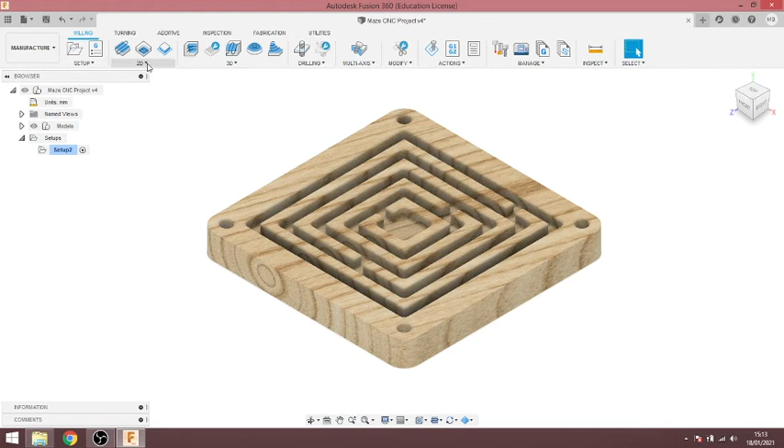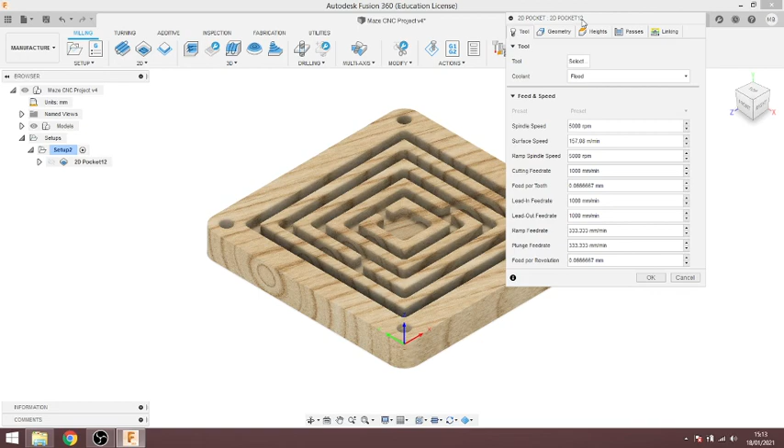So the first thing I'm going to do is, now in this tab here, there's loads of different things you can select, machining operations, 2D and 3D. Okay, so like contours, a great one for using within designs for vacuum forming patterns. For this, all we're going to focus on is a 2D pocket. So the first thing that comes up on here, I need to select my tool. So if I click select, it brings up this window. It may be blank on your computers.

If you look at the left-hand side where it says cloud, there are loads of pre-designed tools in the Fusion library, but we want to have constraints to the ones that we've got to work with. So I've got a named folder directory here for the machine we've got access to, and then all the various cutters that I've been using. Now, within this project, I've already added one of those in. I can share a link to those cutters to you individually.

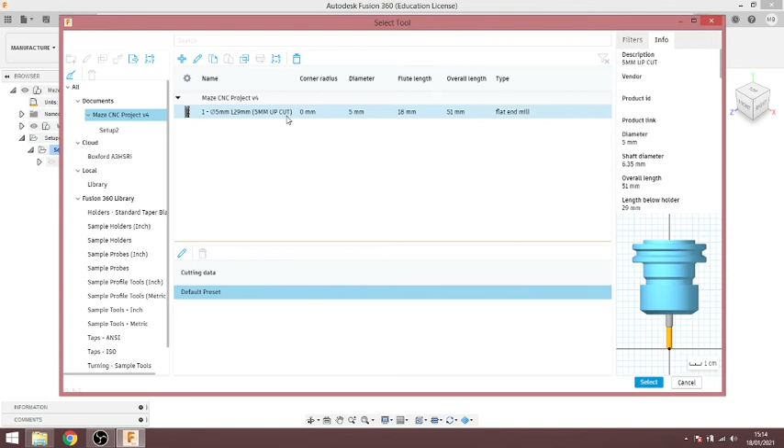So I'm just going to select this 5mm diameter cutter, which is an upcut. So that means that the flute, the spiral section just below the shank, as it's cutting into the material, it's lifting the waste up. Okay, so that does two things: helps extraction, prevents overheating and tool wear. Okay, so press select. So you can now see there's a mock-up tool head there and a cutting tool below.

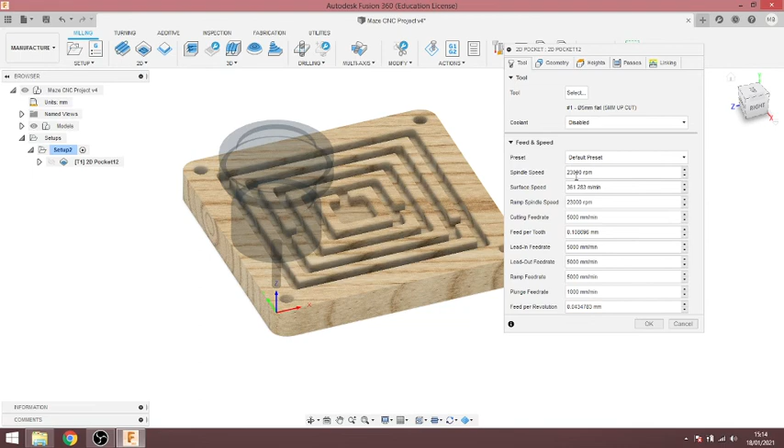So the next thing we need to do, sorry, just worth noting, the feed speeds and the parameters here are preset. That's already been documented in by myself. So within the geometry, we want to select a specific geometry now. So it's important here, you understand you're not selecting the top surface. You want to reference the bottom. And you should be clicking on specified lines, not faces.

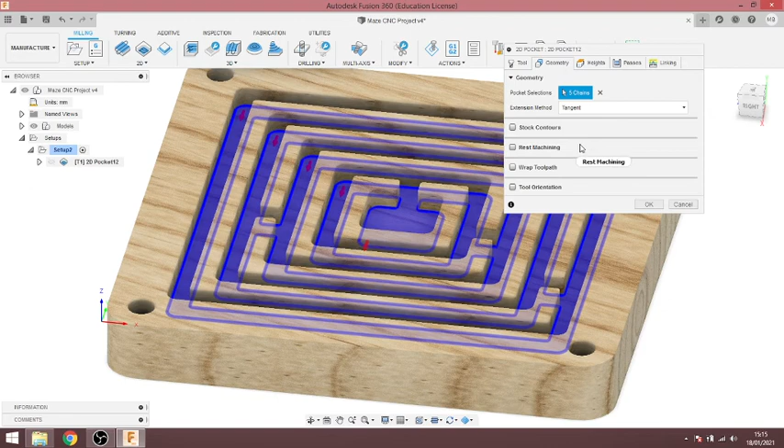Next thing we want to do is set the heights. So if I just look on the side here, there's a couple of things to know. The blue outline is the top height, and that's the top surface of the stock material you've got in, and that refers back to the original setup that we put together. Then there is the feed height and retract height, which are together. So that is the height the tip of the tool will be at when it finishes a machining operation, and the height it will move at when it's going to the next operation.

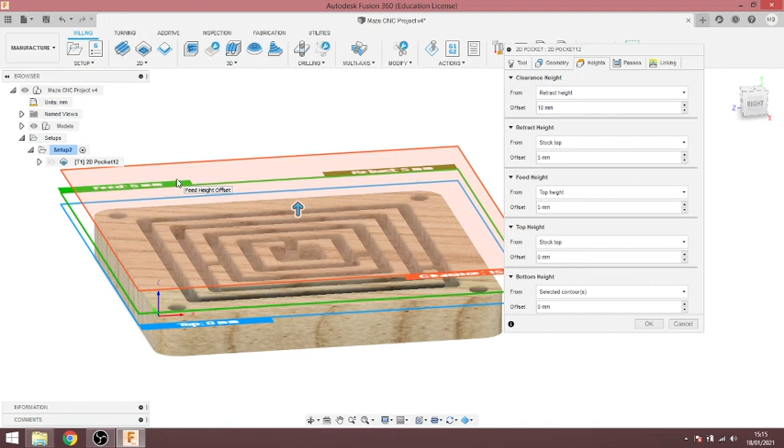And then clearance height is once all the different operations are finished, that's the height the tool will retract to, and then in the machine it will either go back to the home axis or it will move over to a different part of the machine bed and start work on a separate component.

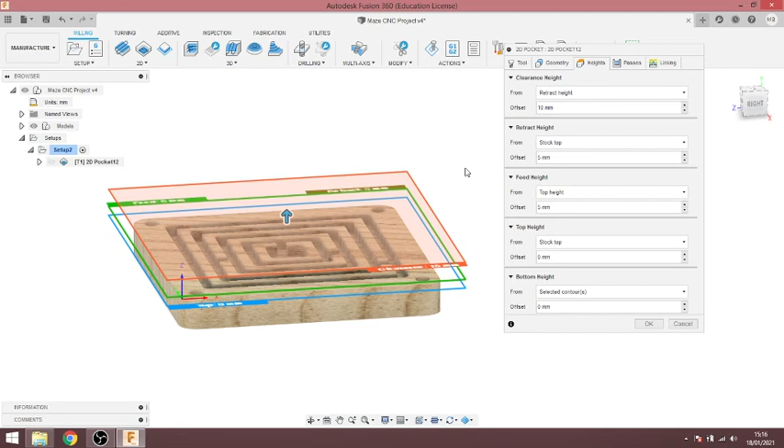So obviously playing around with these heights, you can gain a lot of efficiency if you're manufacturing lots and lots of the same part or different parts, just manufacturing lots of things. So it speeds up the time and reduces Z height travel, which is quite time consuming in comparison to movement in the X and the Y axes.

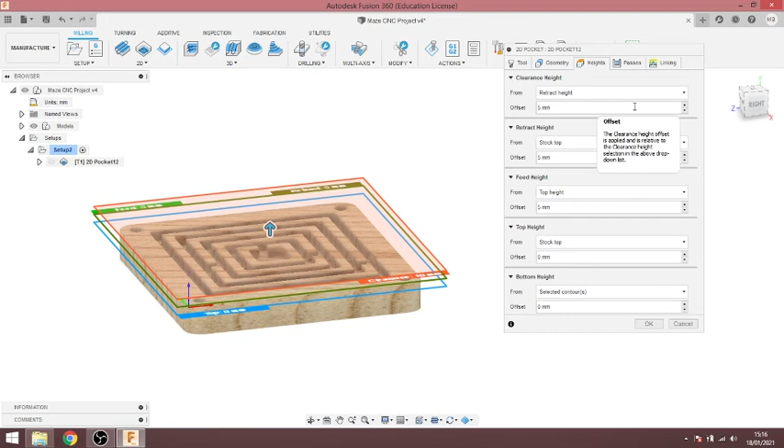So moving over to the passes tab, tolerance can be left at the initial setting. It's worth noting here different types of milling operation.

So climb milling is essentially where the cutter is going sort of in the wrong direction, so it's not actually cutting into the material, it's working away slightly. The opposite, you wouldn't want to do that with a hand router because it can actually get thrown if it catches a knot in the material, but it gives the CNC machine more control.

With conventional milling, your cutter's going into it, so if it hits any material or anything with irregularity, it can cause it to break or even damage the tool or move the workpiece. It's especially important to consider this when using a vacuum bed, which is literally where you use a vacuum to hold the material down in the machine.

So we want multiple depths because we want to make this as efficient as possible without damaging the tool. So when you're using a relatively soft material, so a timber, a softwood, or a polymer-based foam, modelling foam, you can go at the full diameter of the cutting tool. So we can go 5mm stages.

If you were milling a piece of metal or routing out some hardwood or really hard foam, you would want to go at sort of half the depth of the cutter. Well, it depends. It depends on the type of cutter, diameter of it, lots of different factors that come in. But general rule of thumb, with a fairly soft material, you can go at the diameter of the cutter, and it just prolongs the tool.

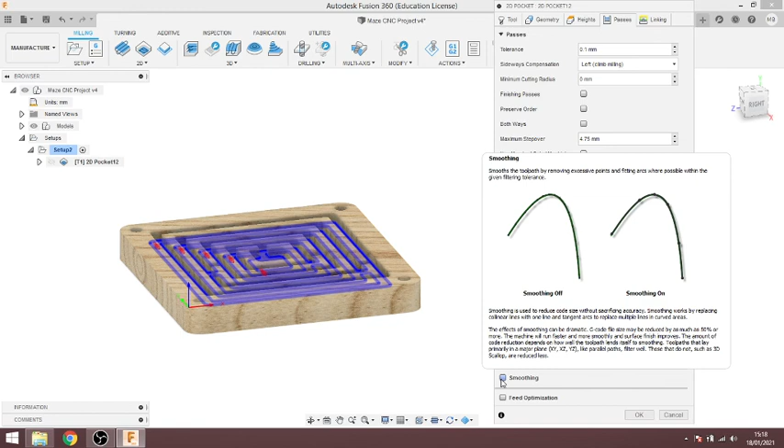So we don't need to leave any stock because we want to work to the exact geometry that we've designed. And then if we go to linking, what we need to do here is, now the safe distance, you might need to adjust that, and that refers to the height that it will lift the tool out in between moves. And then at the bottom we've got ramp type. So lead-in, transitions and ramp type are all about how the tool enters the material.

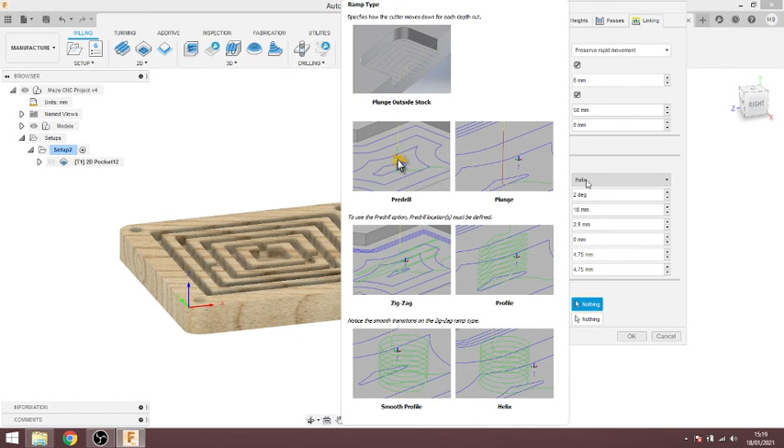Now a helix will actually do what it sounds like. It will enter the material in a helical fashion, but the issue is that channel that I've modelled around that maze design is only 1mm wider than the diameter of the cutter. So we really need that to be a plunge. It wants to go straight into the centre point of that profile and get cutting.

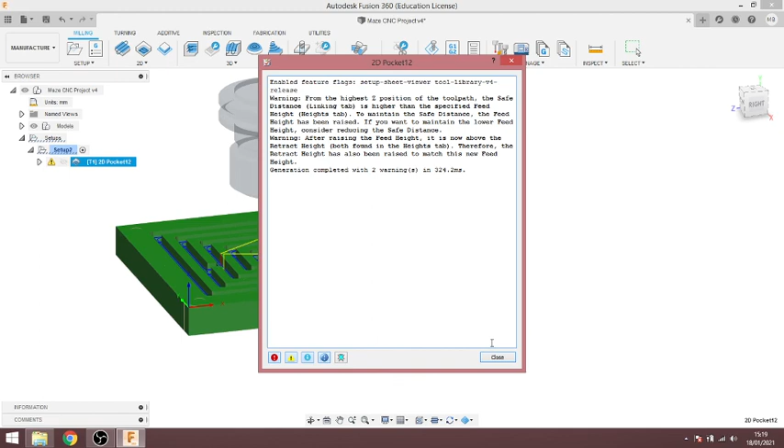So if I click OK, you can see it generating the tool path here. It's thrown up an error. From the highest Z position of the toolpath, the safe distance is higher than the specified feed heights. So what we need to do is just click Edit, go back to that linking tab and just drop that lower. I think the feed height was 5mm. So if we put that at 4.

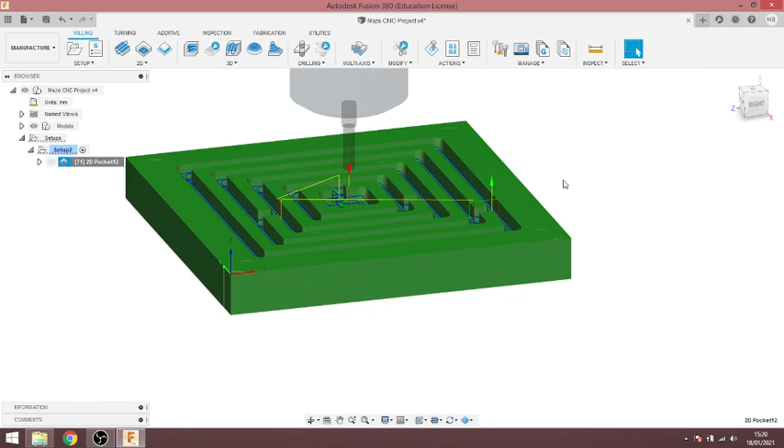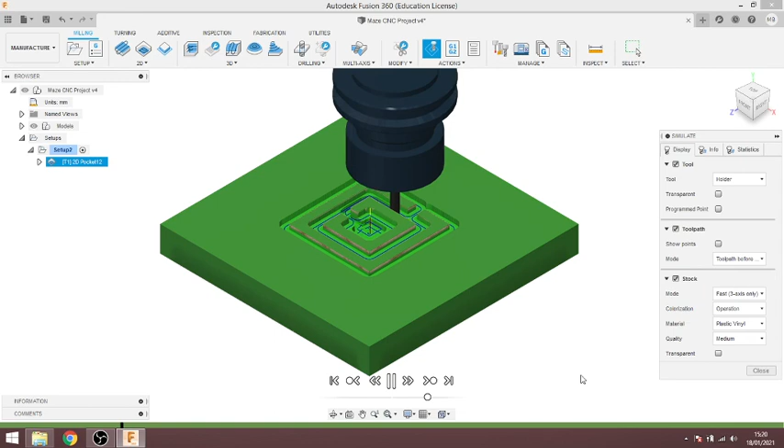So what that refers to in the linking is the yellow lines you see on the screen now. So that's the movement of the cutting tool in between different operations within the same milling setup. So once we've got that positioned and that's loaded correctly, it's good practice to right click on that and press simulate and just watch that cut out our design and check that nothing's been missed, that it's retracting to safe heights and there's not an error.

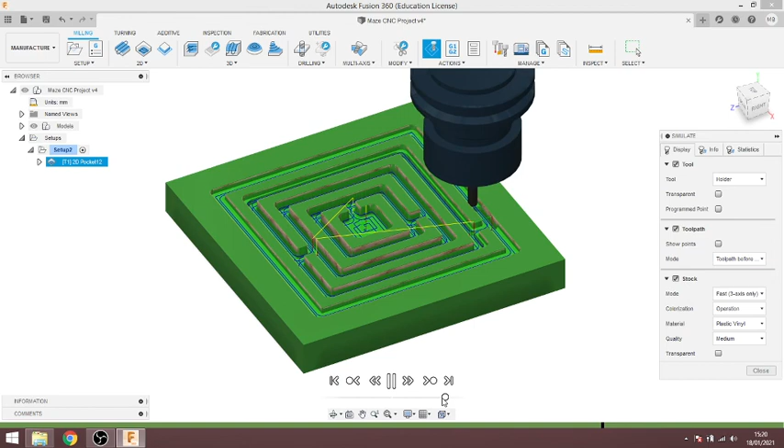Okay. Yeah, that looks good. So we can speed that up to the finish. Okay, so that's a basic milling operation setup, and in the next video we'll have a look at cutting the other features out and then the overall profile and then how we get it sent off to the CNC machine.